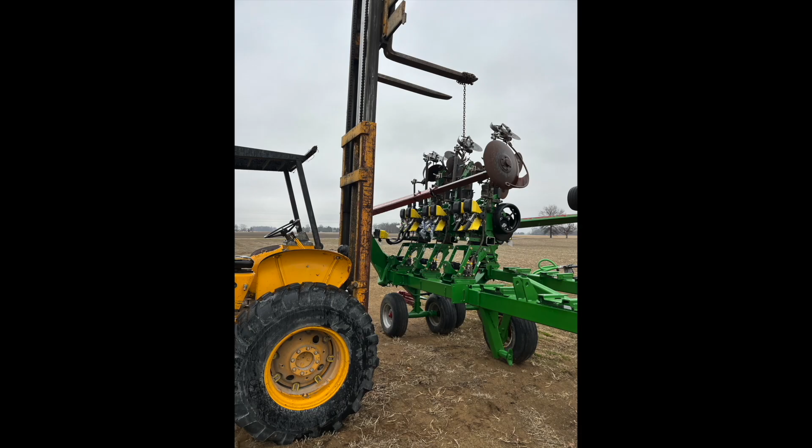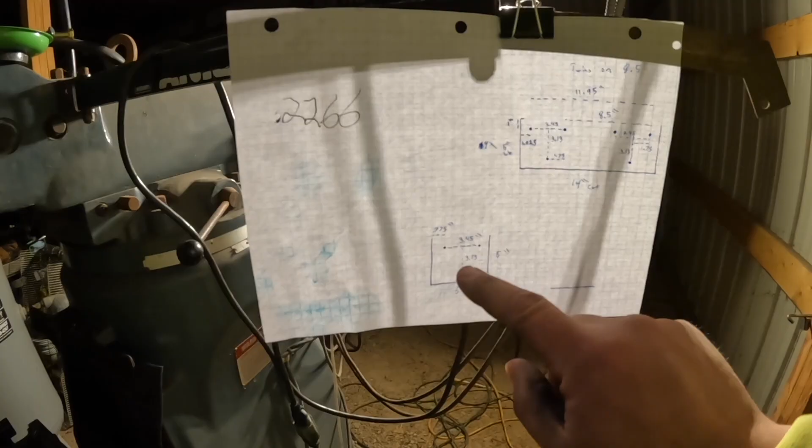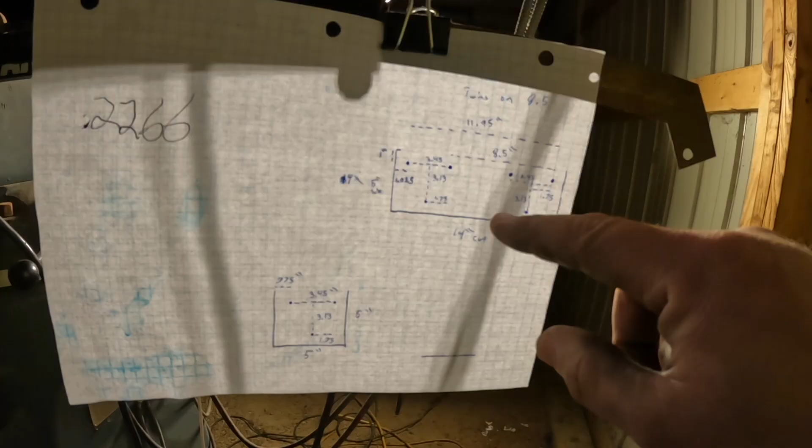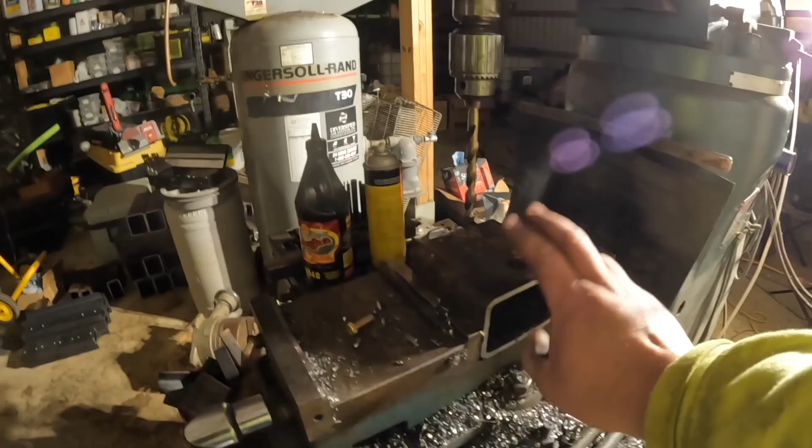Alright, now we're building that splitter. We have two parts: the face, which is this small guy down here - it's a 5x5 - and then the splitter itself, which pulls the two shanks. That's this up here, it's 14 inches wide, 4 by 5 inch tube. So here's the face, we're going to start with it.

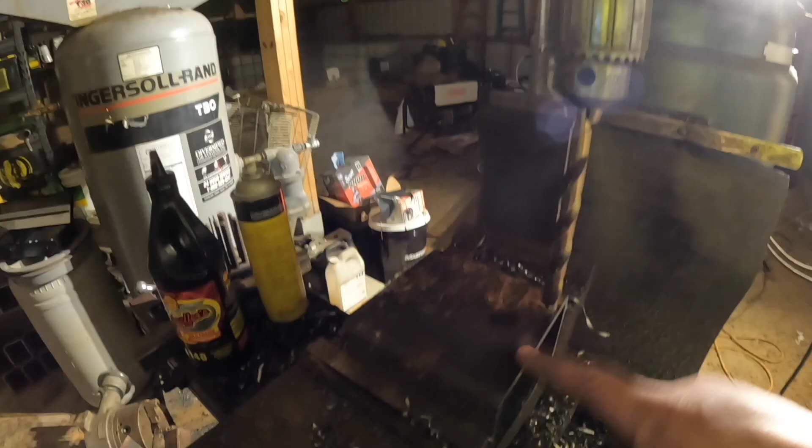First thing we got to do is zero our DRO. So to do that, bring this back. Right there, the center of that drill bit is right on the lip of this piece. That should be 0, but it's not.

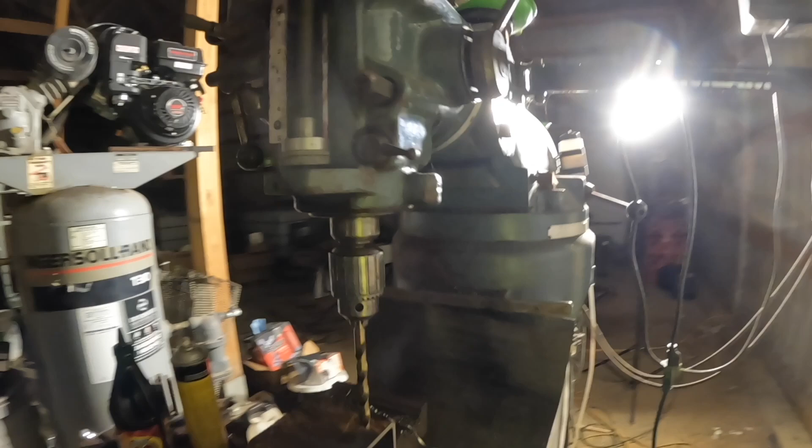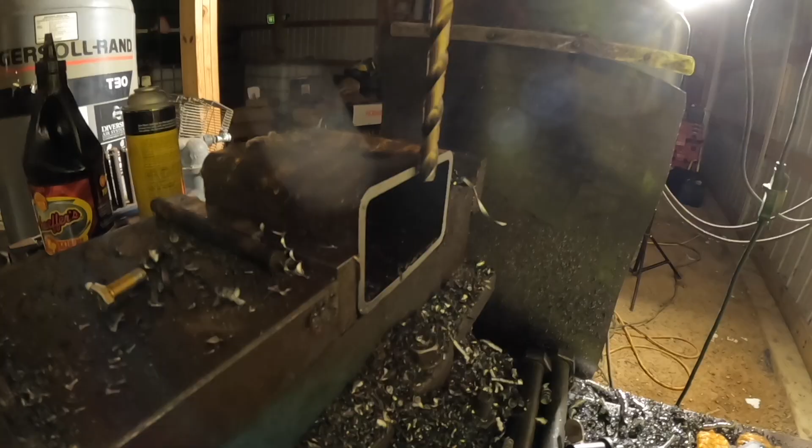So to confirm, before we get this zeroed out, what we'll do is lock our drill bit down like that. We'll run our piece right up to it, just so it kisses. Just like that.

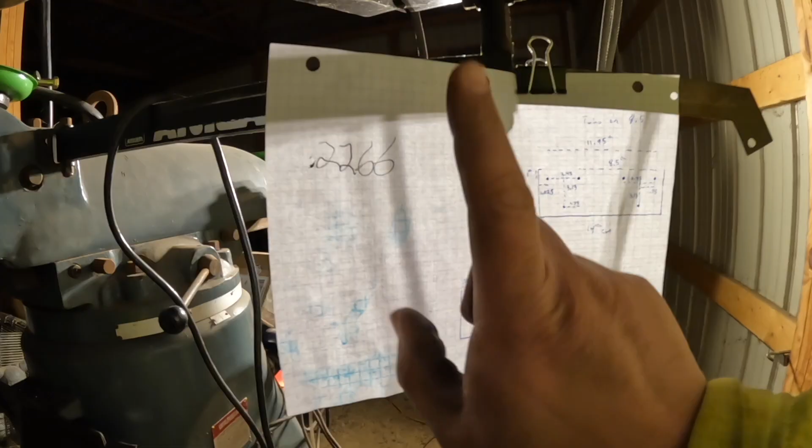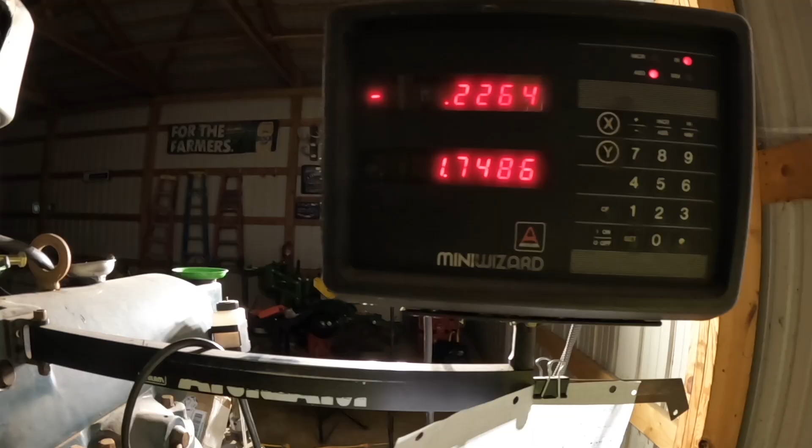I'll come up here to our x-axis, zero it out. Run that up. Now the drill bit I'm using, I'd have to look at it again, but essentially .2266 gets me to that center mark. If I run that over, .2266. Zero it out again. Come down here, right on the money.

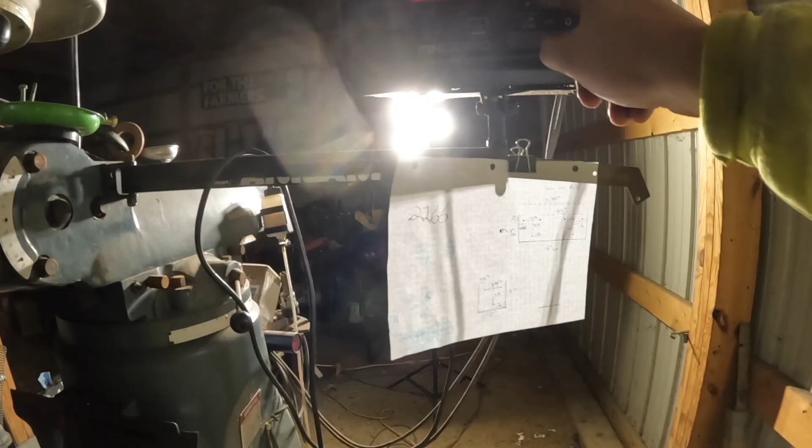Now we will repeat the process for our y-axis. Now we'll get started.

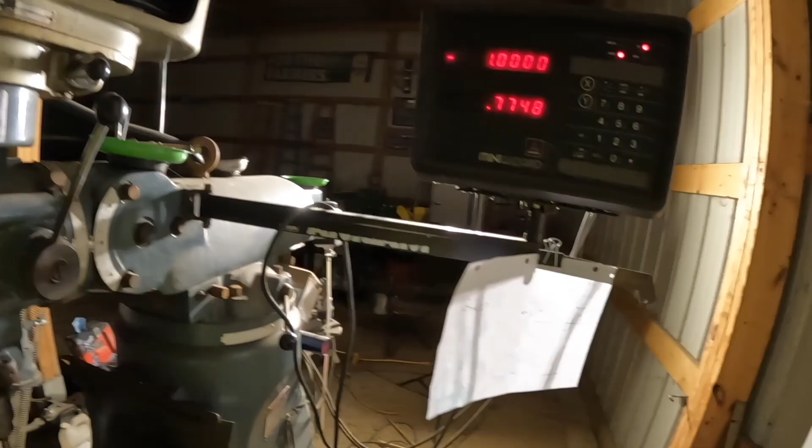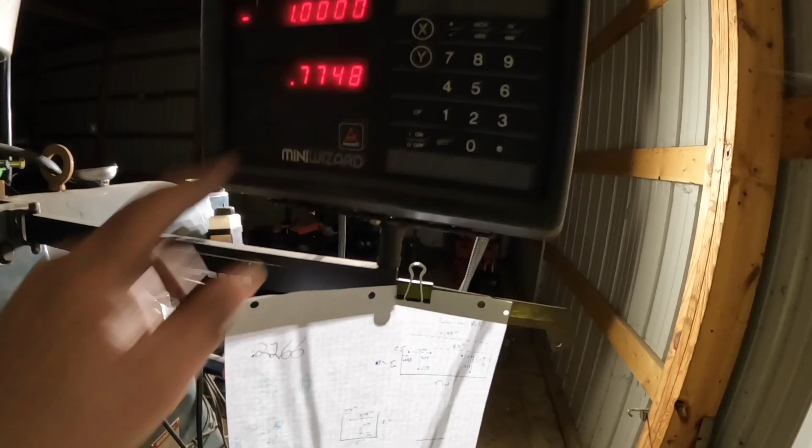Alright, so now with our y-axis zeroed out, I have moved in on the piece 0.775. Well, by the time you get this far out, you're beyond reasonable, so it's basically at 0.775. We're an inch down off the top lip, so we are at this point right here. I'm going to go ahead and drill that. We're going to use that as our 0 for the project.

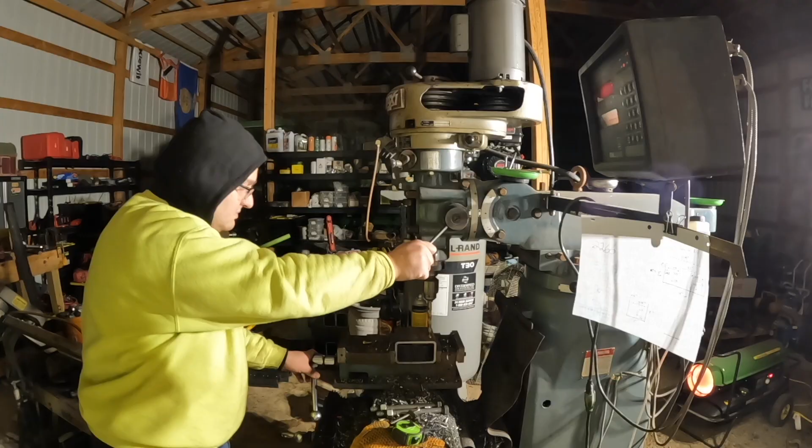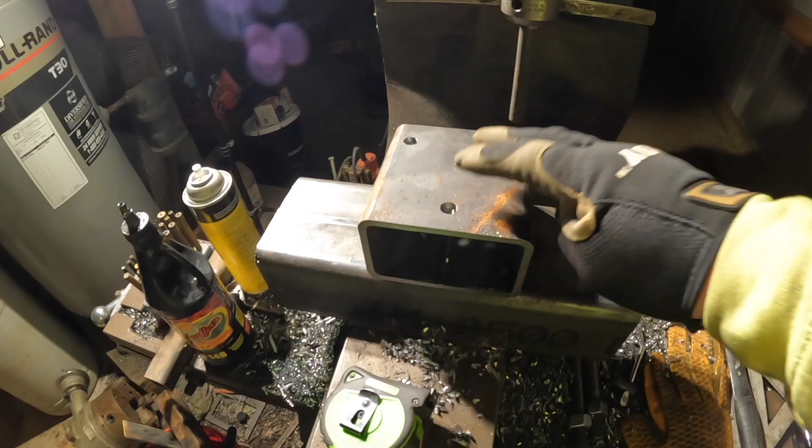Okay, so now it's time to weld these face plates to the actual divider section. So what we have to do first is come up with where center is on the divider. This divider is 14 inches across. These face plates are 5 inches, so that gives us a difference of 9 inches.

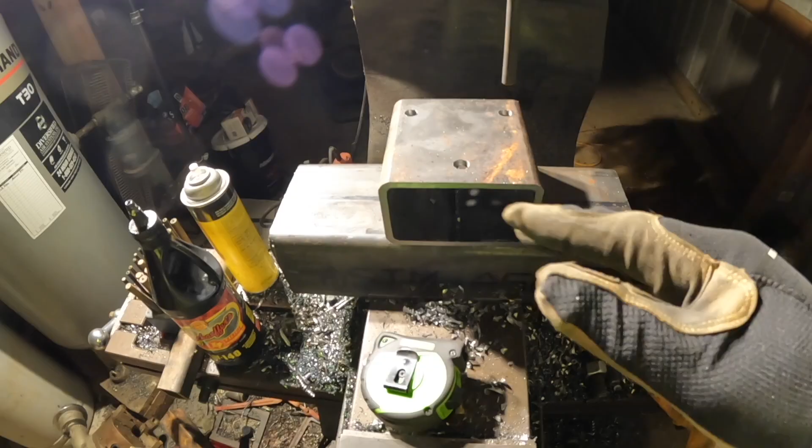So then if I take 9, divided by 2, because you get 2 parts, that gets us 4.5. So that means there should be 4.5 inches on the left and the right.

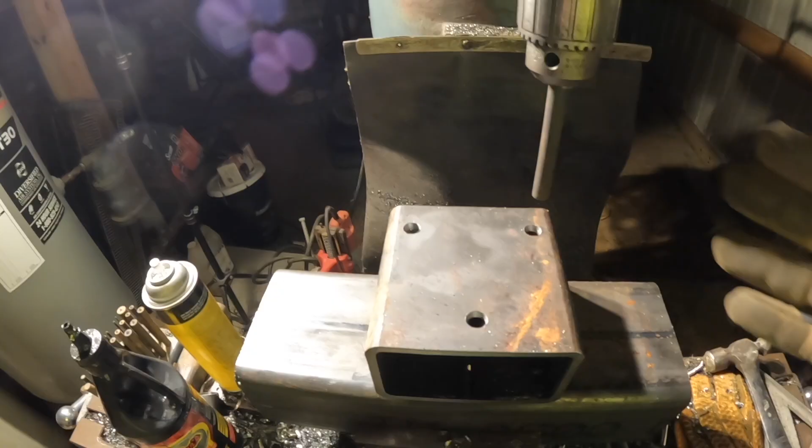So I've come up with an interesting solution for doing this. When you do these types of operations, you need to come up with some sort of constant. And that constant is this milling vise, because this vise is what we used to drill out these splitters as well as these face plates. Now, you're wondering, how does this apply to welding this and finding center and all of that? Well, here's where the magic happens.

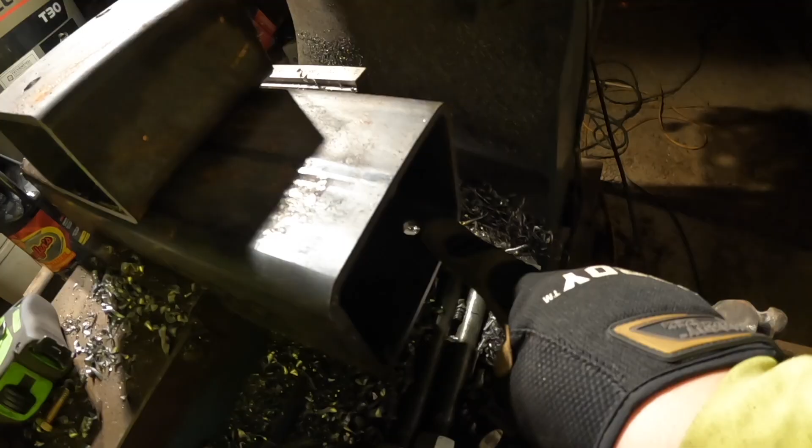So this is Geometry 101. Down there, I don't know if you can see that hole - that is the top hole of this pattern, which is on the planter row units. I need that hole to line up perfectly with this hole, and by line up, I mean that center so the row units function as they should. So that hole is right here on this plane, running left to right. So that will get us the up and down component of this piece here.

To do that, I need to line that up with that hole, with that plane. Anyway, what I did is I took a center punch, chucked it up in the mill - that is the same outside diameter as that hole. If I run that down like this, all of a sudden I know those holes are on the correct plane.

So then all we got to do is our left and right, which is fairly simple, right? That's just taking a ruler or tape measure in this case. So that's what I've done here. I did that before, trying to do that with my camera in hand. You can see 4.5 inches right on the money.

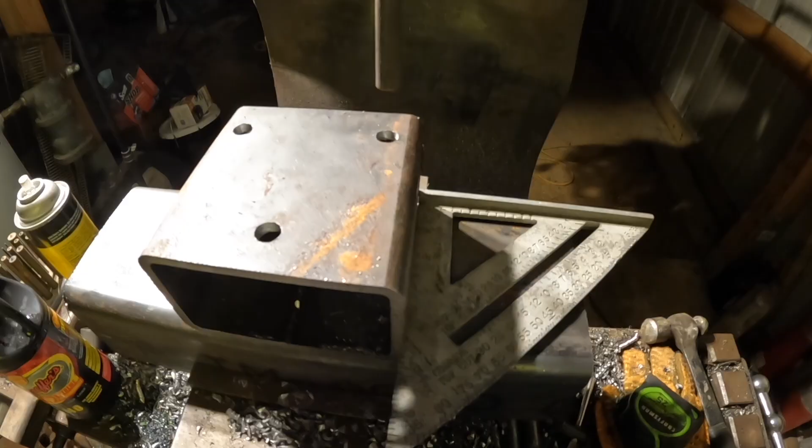Now there's one last component that involves a speed square. Let's just run that up tight like that, because whenever you do something like this, it tends to move this a little bit. So that appears to be on square or the like.

So now what we'll do is we'll move our vise over. Went too far. Went too far again. Trying to hold the camera and do this at the same time is not fun.

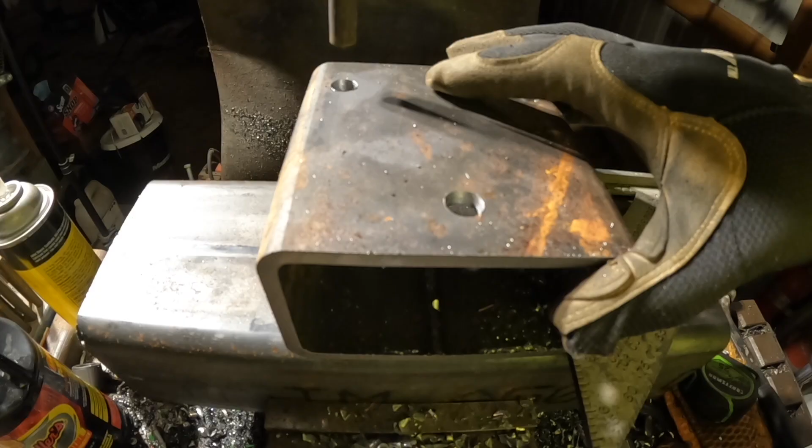Okay, so it looks to me like we need to turn that a little bit. This is where those speed squares, they're nice, but they're not.

Some of this is because of that milled edge, not milled in terms of this type of milling machine, but because of things like mill scale. It was off by just a hair, but now we are good. So we're 4.5 on this side, 4.5 on that side. We're on the same plane as the holes down here.

Now what we got to do is remove this from this vise, take it over, weld it, and repeat 10 more times. Hooray.

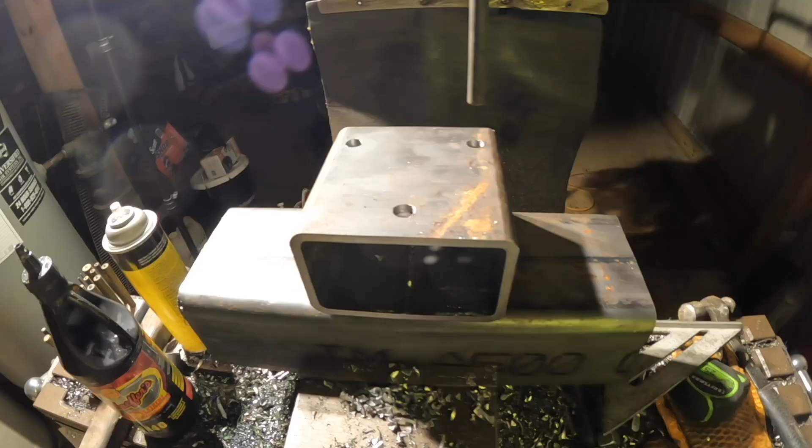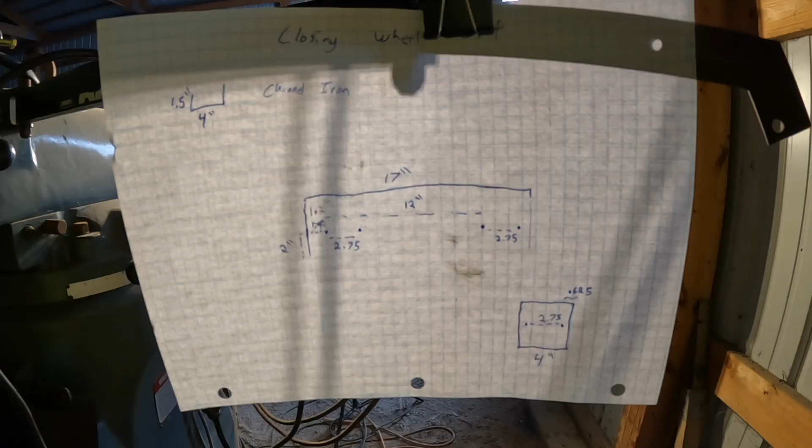Alright, so I'll give you a little bit of an overview before I go fire up that generator and you can't hear anything. This is a drawing of that closing wheel extension.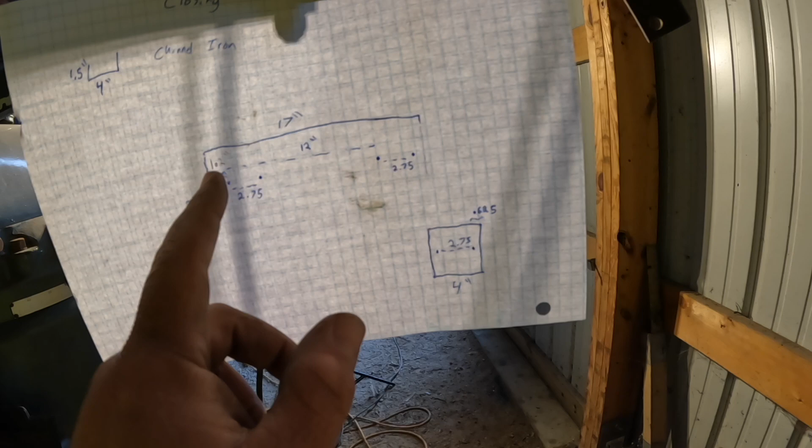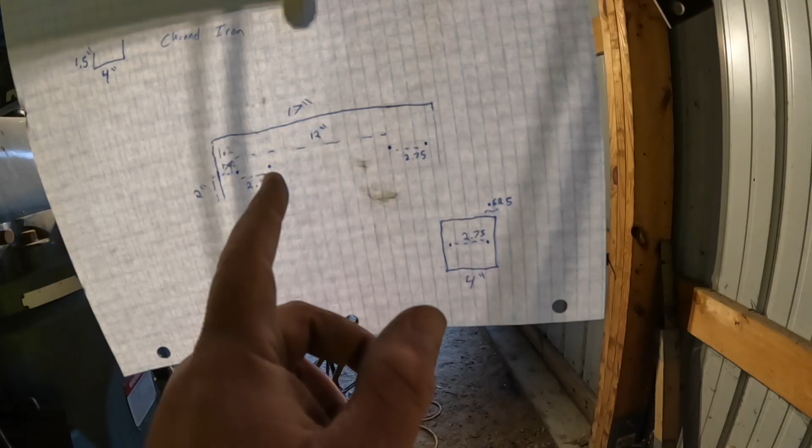All we got to do is take a piece of, I actually made these 18 inches, channel iron, and I'm coming in 1 inch from the one end. This is the end that's going to be exposed to the closing wheels, and drill my first hole. Go back 2 3/4 of an inch, drill the next one, reset to 0, go back 12 inches, and drill the remaining 2 holes back there, same spacing.

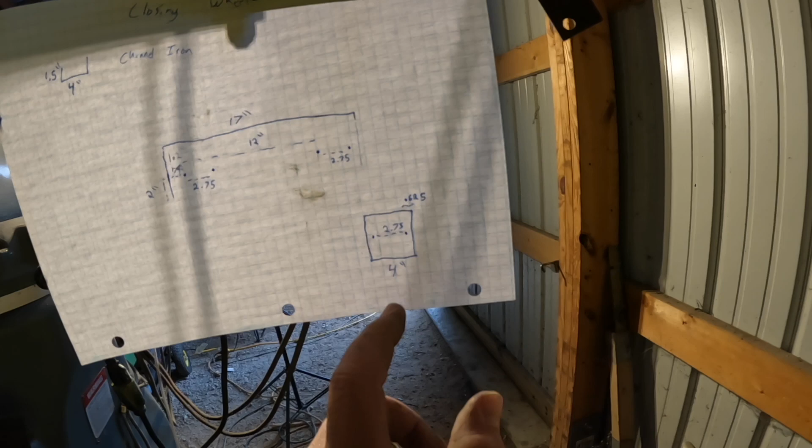We will also have 2 4-inch pieces of channel iron. It's just going to be a 4x4 with those 2 3/4 inch hole spacings. That is going to be on the opposite row, the row that we don't need an offset.

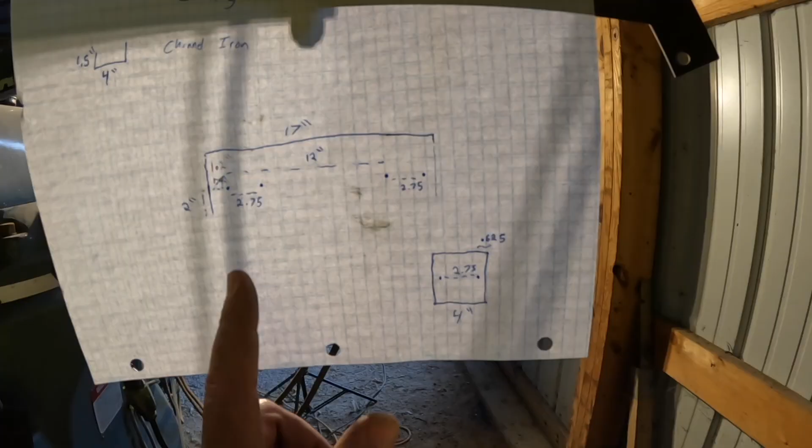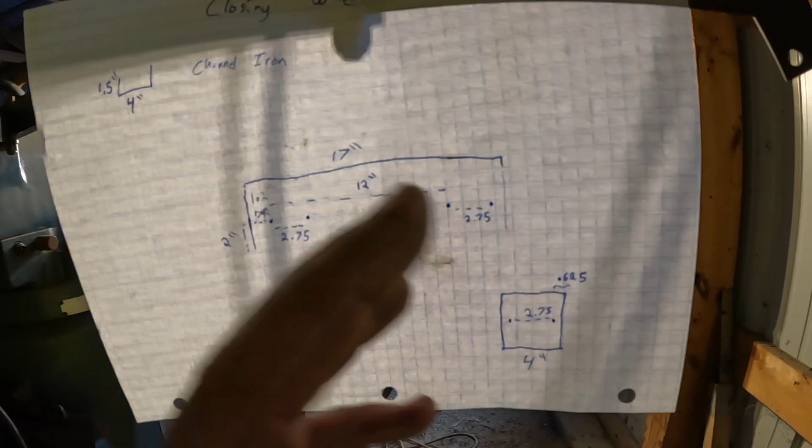And the reason that we're doing this is for a brace. Now, how that works is this will be basically right up here at the front. Well, to make it even more realistic, it's going to be up here on the partnering row, and there's going to be a 1 by 1 by 1/8 inch wall piece of square tubing connecting the 2 row units at the back to compensate for forces as the planter goes around the corner. So that'll be welded once these two pieces are bolted into place.

So without further ado, let's go fire up the generator, start drilling some holes, and have some fun.

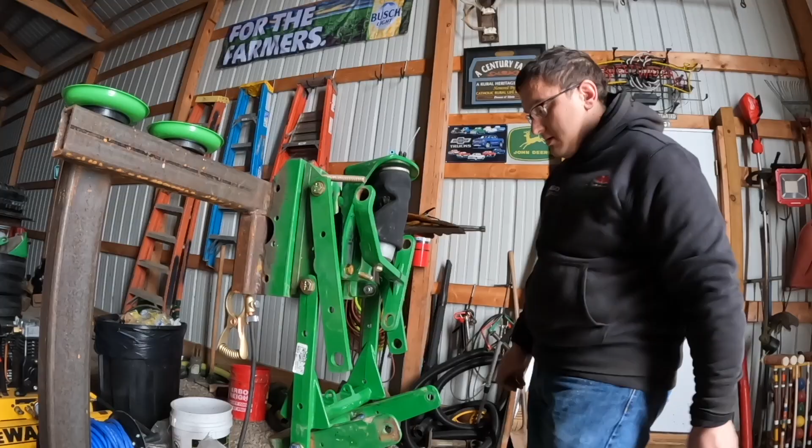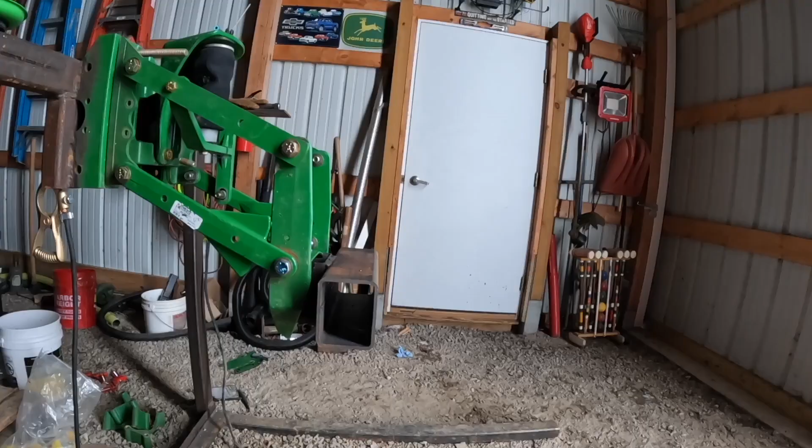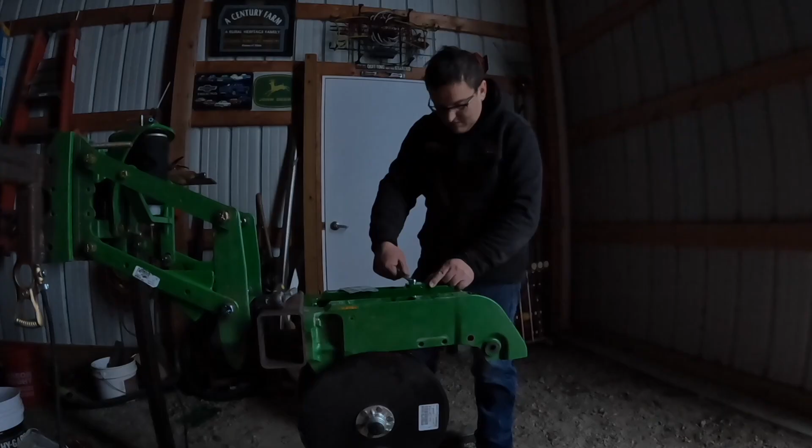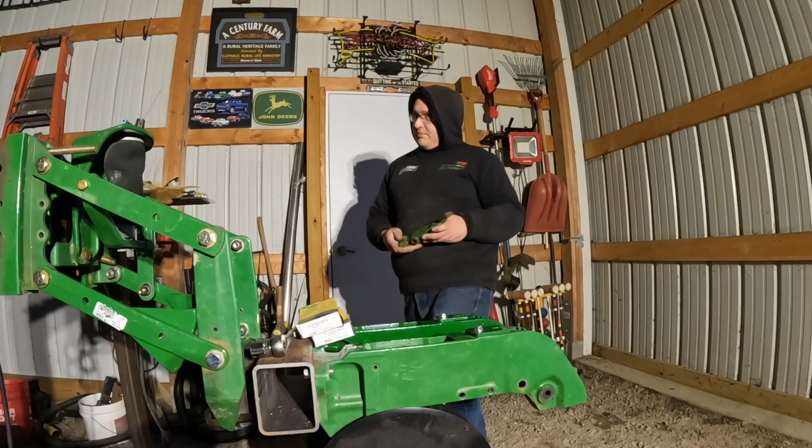Another problem we had to overcome when designing this planter was this, which is a walking gauge wheel assembly, which allows the left side or the right side gauge wheel to move independently of the other.

And why this was a problem on this type of planter is because, well, we're going to have one gauge wheel on one side completely opposite of the other, meaning, well, I'll bring you around. We're going to have one gauge wheel over here and then the other over here on a completely different shank. If one of these is here, well, naturally it's going to always be riding like this.

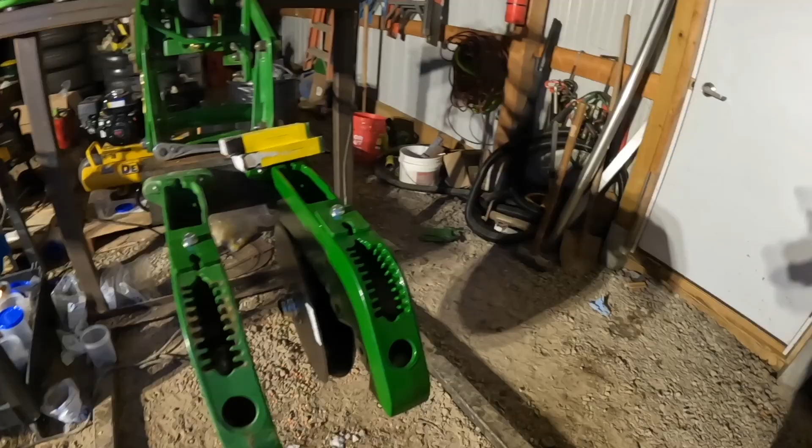Now I suppose that would work, but why do something like that? Now all of a sudden we've got an inaccuracy forming in our seed depth. The whole reason we're banging our head against the wall.

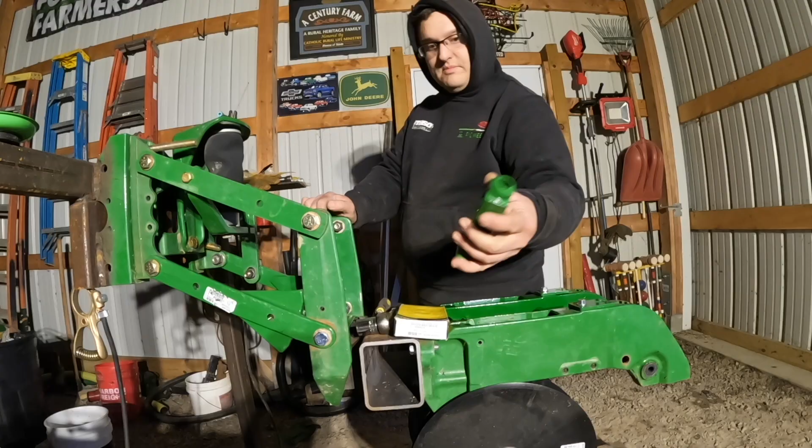So our friends at John Deere already had this figured out. That's that part number right there. And essentially what it does is it eliminates that walking tandem. It makes it into more of, I would say, like a 7000 series planter was, with how it adjusts for seed depth, in that the gauge wheels do not walk. So on this side, the side closest to you, it's only going to wear on this half of the depth stop.

So of course they don't come assembled. You have to do that fun stuff, which I guess we're assembling a planter anyway, in the cold shop.

Turning the heat off just to walk you through how we're doing this. So basically this comes in two parts: you've got the casting and you've got the T-handle, which locks into your notches there at the back.

You take that T-handle, drop it into the casting, get your spring worked in there like so. Now we just put a snap ring on there, because snap rings are fun. I mean, I guess they are if you get the right tools.

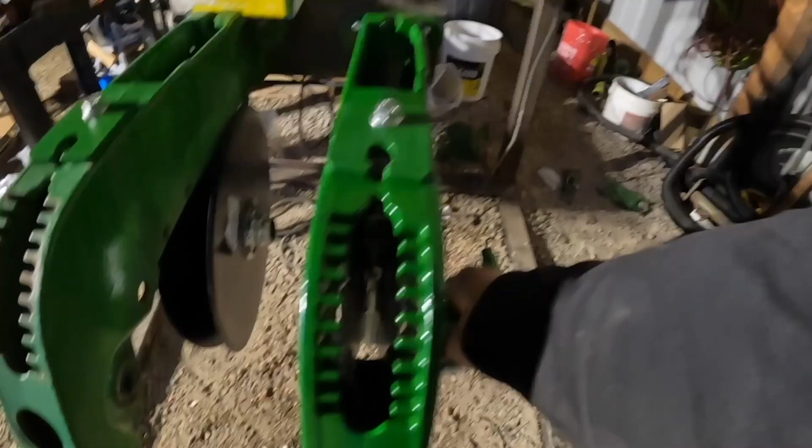Perfect. You gotta repeat that 23 times, 23 more times. Anyway, here's how this works, let's bring you up here. This goes up in there like that. Trying to do this one-handed.

And I put it in upside down. There we go. Like such. And you gotta put the T-handle up in there.

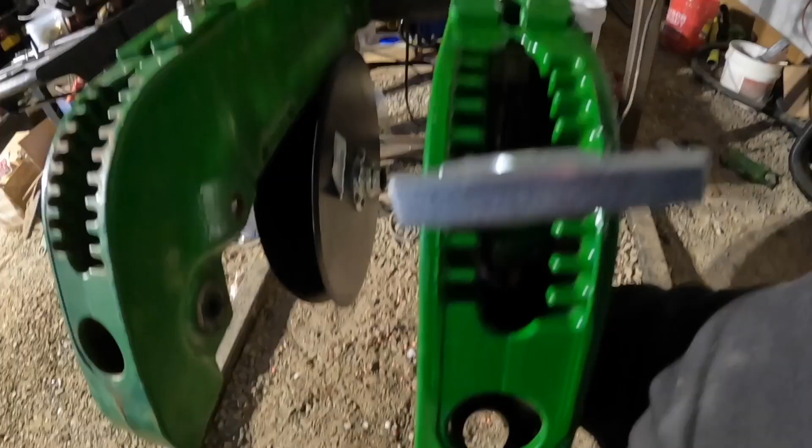But you get the idea. Trying to do this one-handed is not ideal. There we go. Now you can see the stop. So, like I said, we just repeat that.

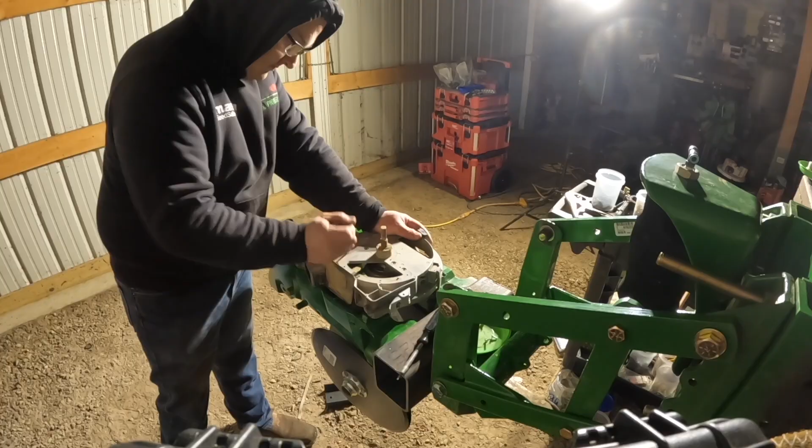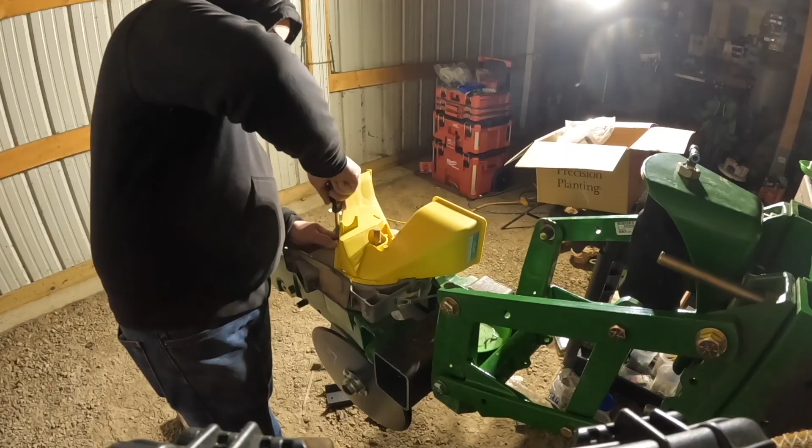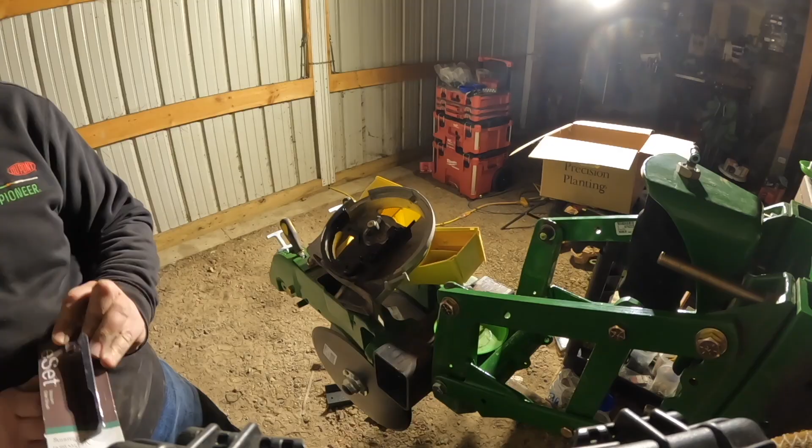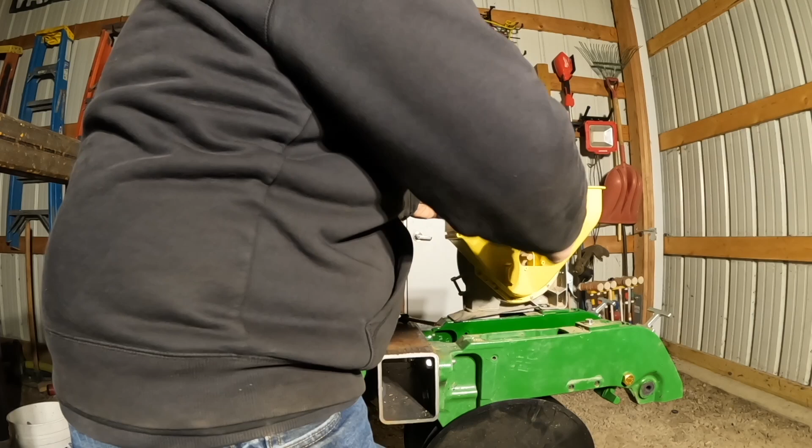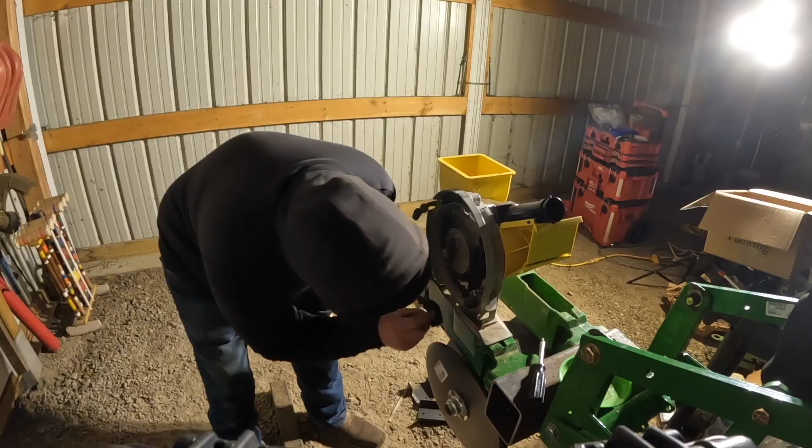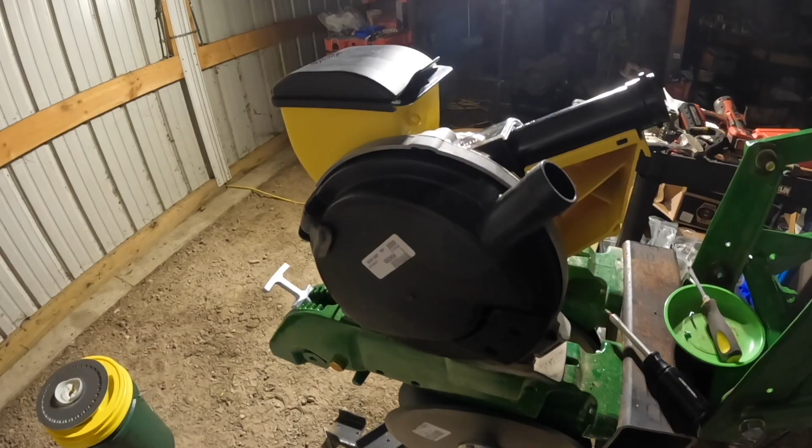Well, there you have it. One complete Precision Planting eSet.

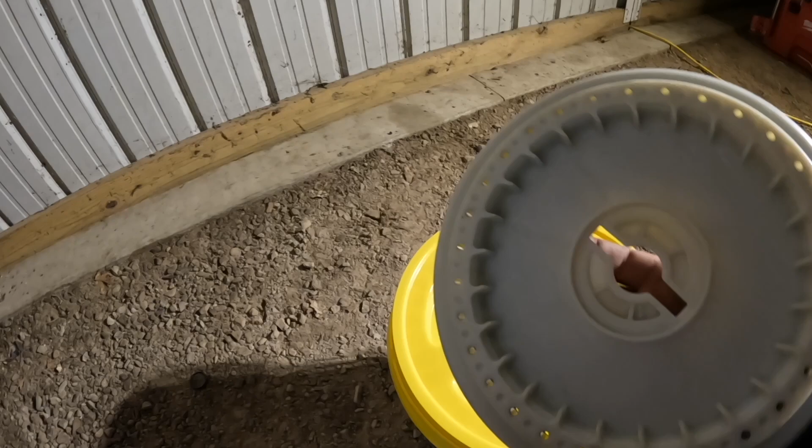Now, these use a different style of disc, the heart and soul of it right here. And this is what we're going to block off every other one with some JB Weld, that way we can get that diamond pattern.

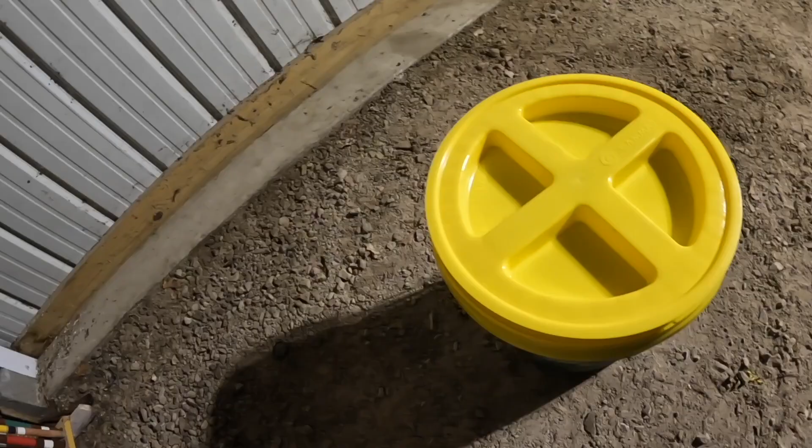And I'm not going to actually store these in the planter. What I'm going to do is store them in these buckets. I found these little, I call them Gamma Seal, bucket lids. They're universal fit, they clip right onto your standard

5-gallon bucket you can get at a hardware store, and those meters fit in there quite nicely. So supposedly, I read somewhere you can fit 11 in one bucket, so that might be a problem, being that we need 12 lefts and 12 rights.

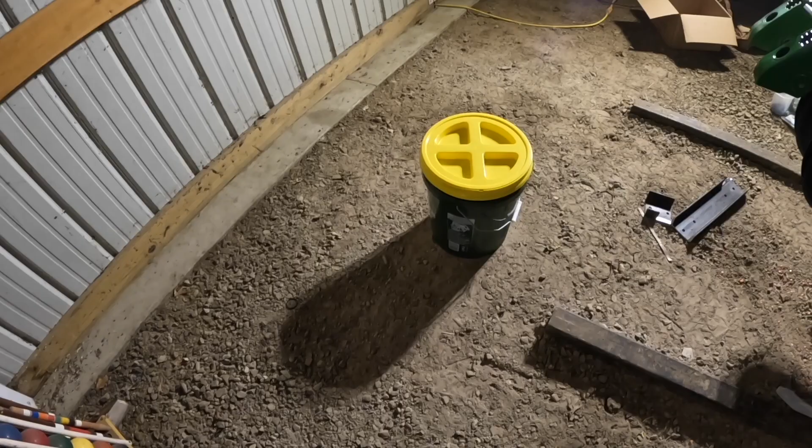But I will say those store a lot nicer than what the Great Plains meters stored. So if I have to get a couple more buckets, well, it is what it is. So that's where we're at.